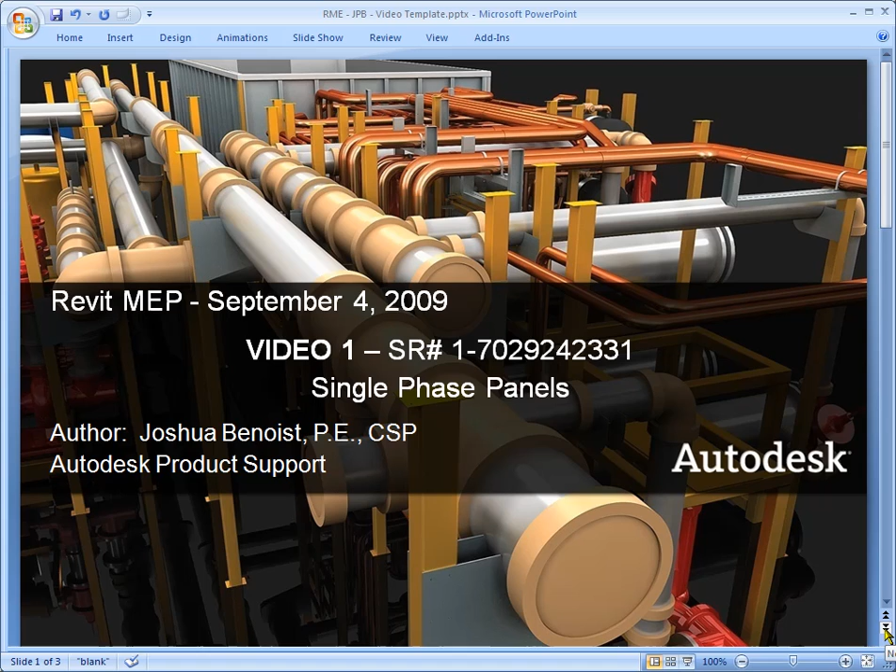So, we're going to talk about single-phase panels in Revit MEP. So, let's look at the problem statement from the customer. Are there families for single-phase panels? We have a project that needs one, and where do we find them? Alright, so let's go do that.

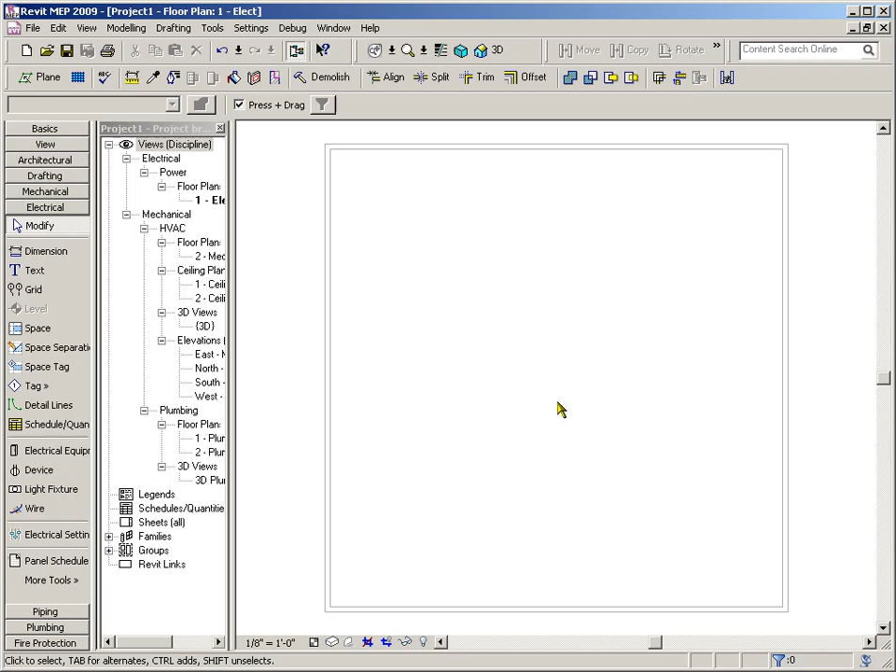So I've drawn 4 walls. I'm using Revit MEP 2009 because that was the version that the customer asked the question in. And so first thing we want to do is load a panel into our drawing. The answer is no, single-phase panels do not come out of the box. So what we need to do is make some, and it's not that hard.

Alright, so let's load a panel, and you'd go up to File, Load from Library, Load Family, and then we would find Electrical Components. By the way, there's the Imperial Library button down here for those watching the video. You can always click on this to get to this point in which you would click on Electrical Components, and then we would look at Electrical Equipment and Panel Board.

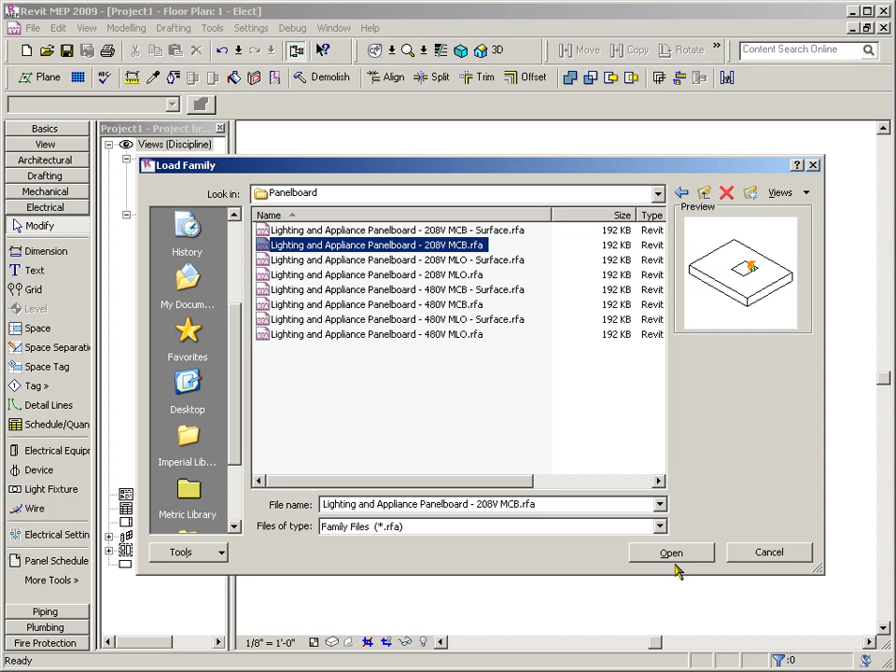So if I expand this over, you can see that we've got 208 volt and 480 volt panels out of the box in 2009. I think there may be more in 2010. So anyway, let's just choose one of these 208 volt, and we're going to insert this into our project. Since I did this earlier, I'm going to just go ahead and let it override the parameter.

So first thing I'm going to do, I'm going to switch to our electrical tab and click on Electrical Equipment, and I'm just going to place one of these right here on a wall and say Cancel. So I'm going to select my panel, and I'm going to say Edit Family. So we're going to open that family for edit. So here's the panel board family.

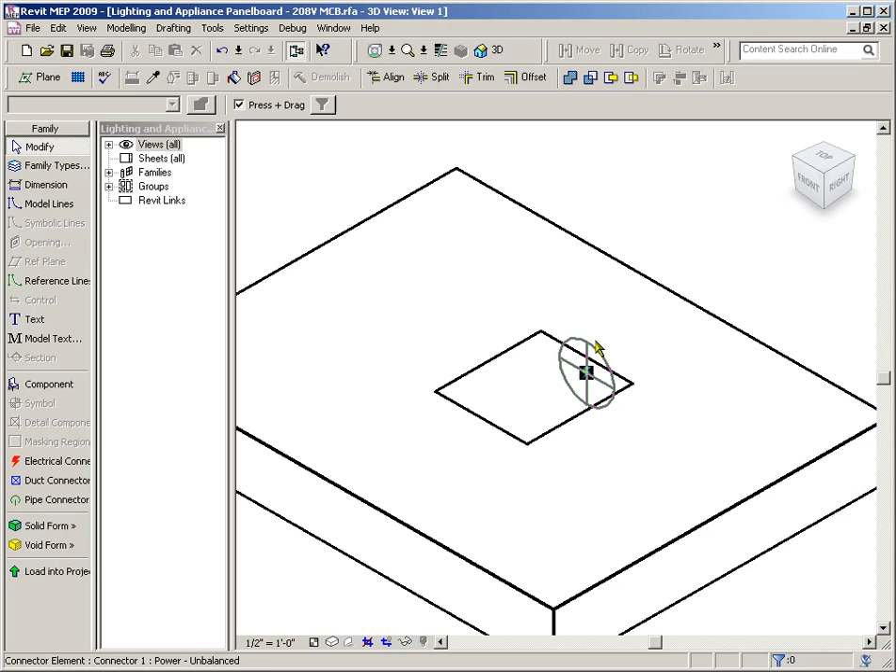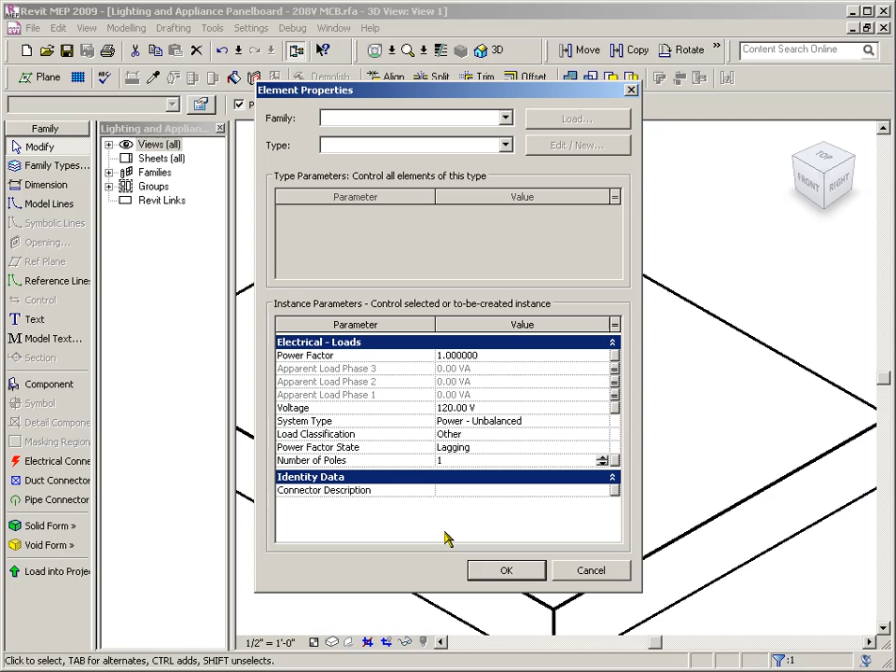Our electrical information is stored on the connectors, so we need to select the electrical connector. Then click on the Edit Element Properties button, or you can always right-click Element Properties. So this comes up, and here's where we can set the voltage and the number of poles. So we might want to change this to 120 volt single phase. Say OK. And then actually one other thing, family types. Yeah, I think that's what we wanted to do.

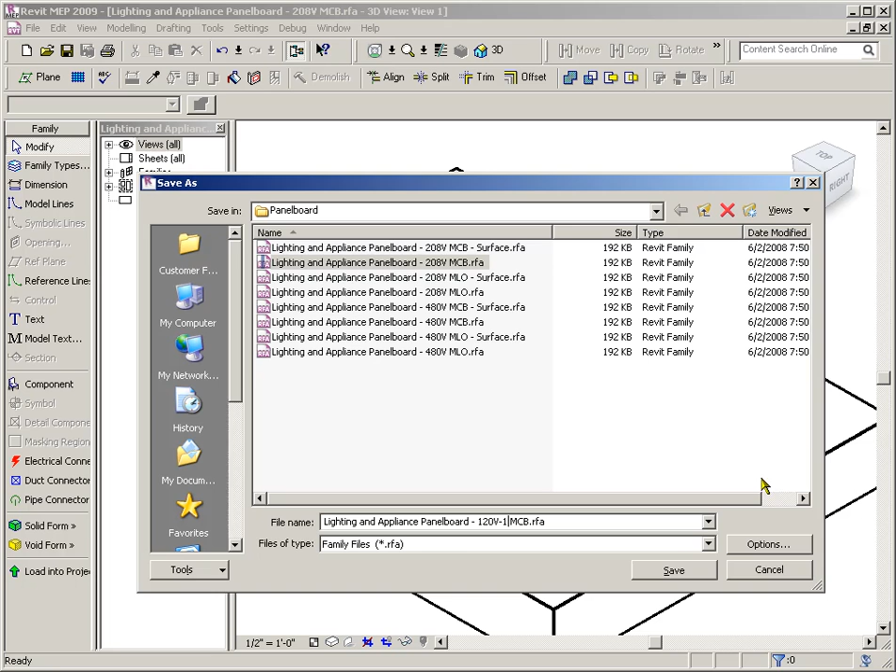So now that we've converted this into a 120 single phase panel, we may want to go up and say File, Save As, and then just say right here 120-1 or something like that. Okay. So I'm going to cancel because I don't want to do that, but you guys should. So anyway, load this into our project. So now we've got a panel

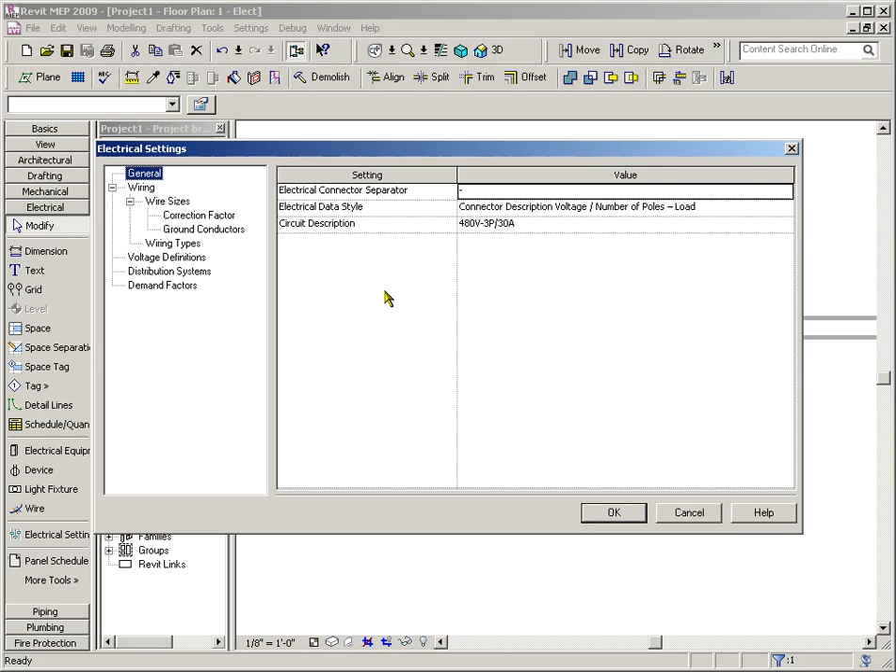that is 120 volt. Let's go up into the electrical settings. Electrical settings. Click on distribution systems. So we've got 120/208 3-phase, 120/240 single phase. Yeah, so here's our various distribution systems.

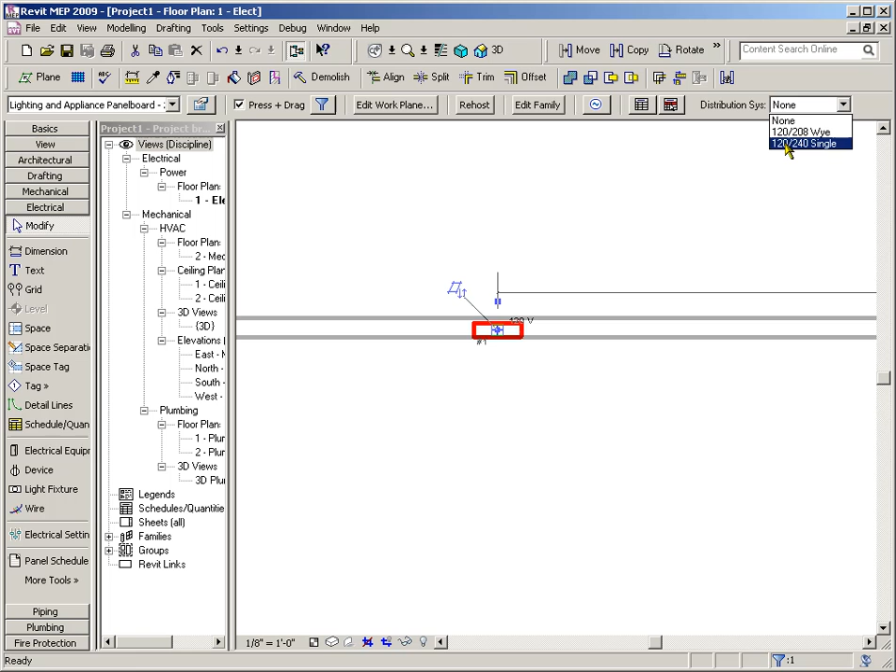If we choose this, and then on the options bar, it becomes available, telling us, oh, well, 2 distribution systems match 120 volt. So we'll choose this one, and now you have an electrical panel that is 120 volt, and we've assigned it to a single phase distribution system. And now you can circuit your devices up. Notice we also do not have single phase devices. You need to do the same thing.